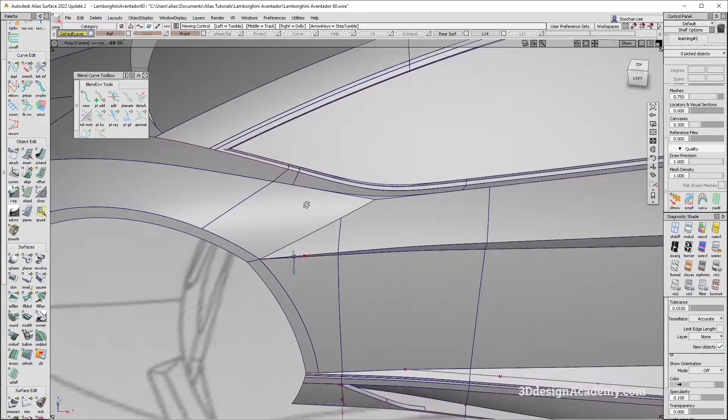Now this is going to be a little bit more difficult because first of all, there are two surfaces that we have to go across at this side, and also this fillet comes to a point. So it's going to be a conical fillet, and also it needs a hard edge over here. So this might require a lot more work than regular fillets. We'll see how it goes.

Okay, so I'm going to start by laying out some curves. And actually, before I do that, let me just extend this one with merge off to see how the intersection is. Okay, so it's pretty close. I would say that's good enough.

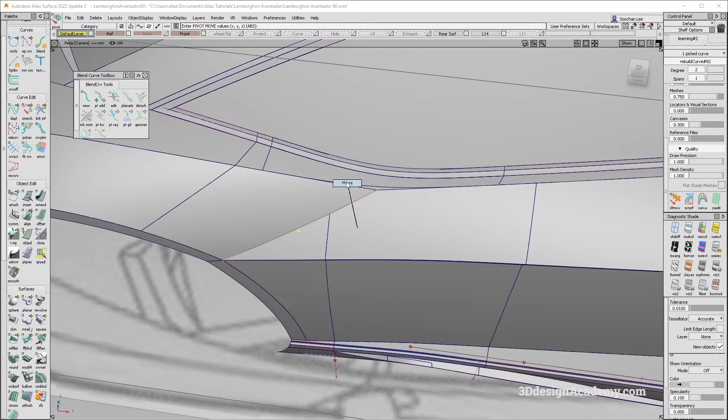So what I'm going to do is just duplicate this curve here. I'm going to snap it over here, and I'm just going to snap this one over here. Now I am going to make this a little bit like a cone-shaped fillet, because I think the fillet is starting somewhere over here. So let's push this in over here, and let's grab this side like this, and push it in over here like that.

Okay, so I'm just going to project and compare the two. First, let's project this from view like this, and I'm going to project these from Z, and I'm going to take a look how the fillet turns out.

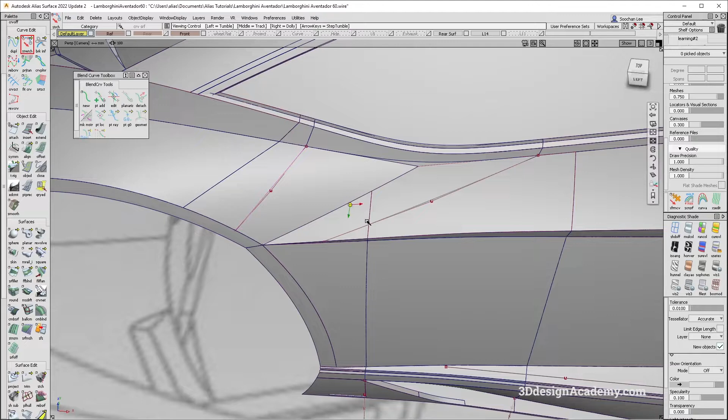So I'm just going to do a little bit more cone shaped, bring this in a little bit like that. Now you want to keep the volume somewhat similar, so I probably need to push this out, because as you can see, the distance from here to here and this here to here is similar, but if you actually measure from a normal direction perpendicular to this line, you'll see that there's a lot less room. So it might not be a bad idea to push this out a little bit. We'll have to see.

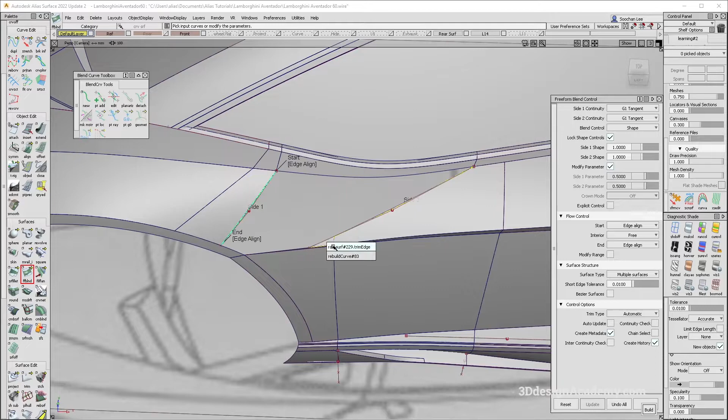Okay, so for this one, let me just trim over here and here. Let's go ahead, and I'm just going to test it out with a Freeform Blend. So let's do that, and I'm going to say default here, and both sides are going to be G2 like this. I'm just going to take a look at the fillet itself.

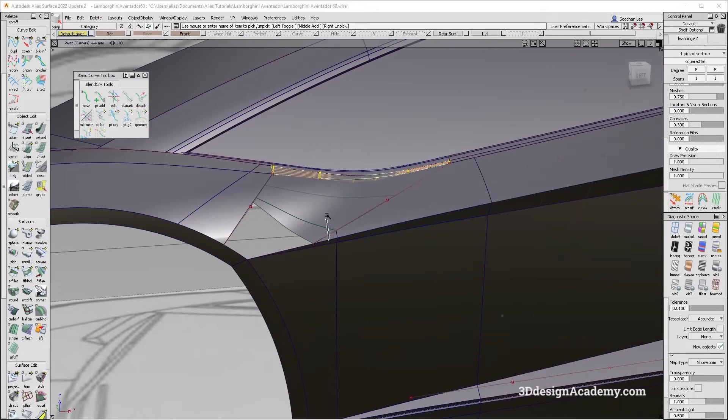It's not bad, but you can definitely see that it's a little bit tighter over here. And also we are going to have a form factor. Okay, form factor doesn't work. It does need a little lead in, because the fillet over here also has a lot of lead in. So there we go. Overall, not too bad.

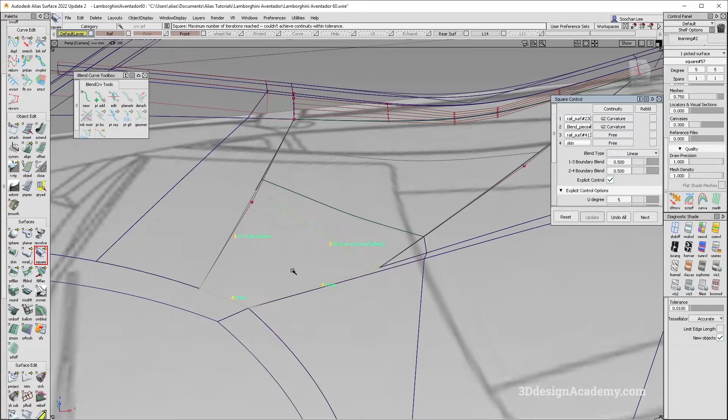What I'm going to do though is I'm going to try to fill this hole over here and see if the fillet is good. So I'm going to say 1, 2, 3, and 4 over here, and I'm going to hit this edge. Now for this one, what you want to do is make sure that 1 is curvature, 3 is position, 4 is going to be position, and 2 also needs to be curvature. But I am going to take a look.

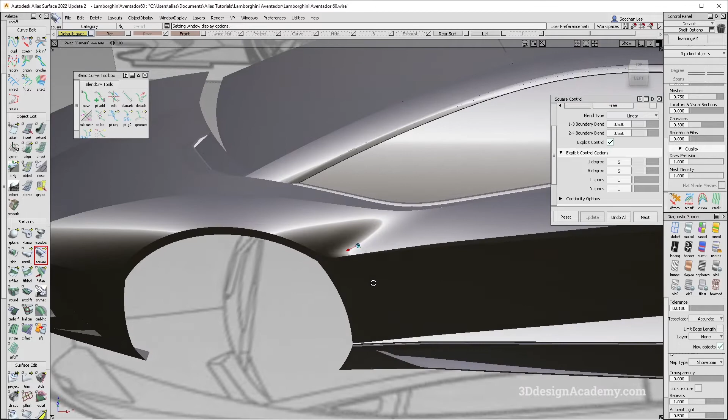Okay, so you'll see that it's actually dipping down a little bit. So in this case, what you want to do is either do a boundary blend over here, or do a little bit of manipulation here to make sure that that's working. That said, however, actually that doesn't look too bad. Now you'll see that there's a little bit of wobble here, but that will need to be fixed later.

But I'm just trying to see if it's creating a somewhat decent highlight, and I honestly think that this doesn't look too bad. Now there is, well, actually, I guess not. Right, so I think the transition might be a little bit harsh. I'm wondering if I actually need to open this up a little bit.

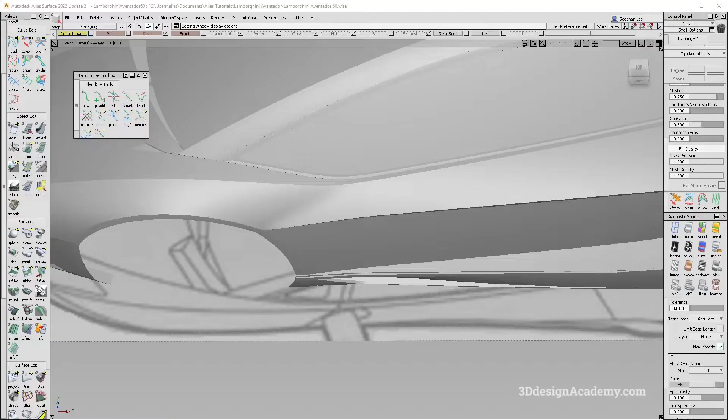Let's take a look. I wish I could see an image that shows that section a little bit better. Now this should show this a little bit better, but I think it's not showing us the kind of highlight that we are in need of. Okay, so I'm going to see if I can find a different image that shows that area a little bit better than the ones we have. This one, no, that doesn't work.

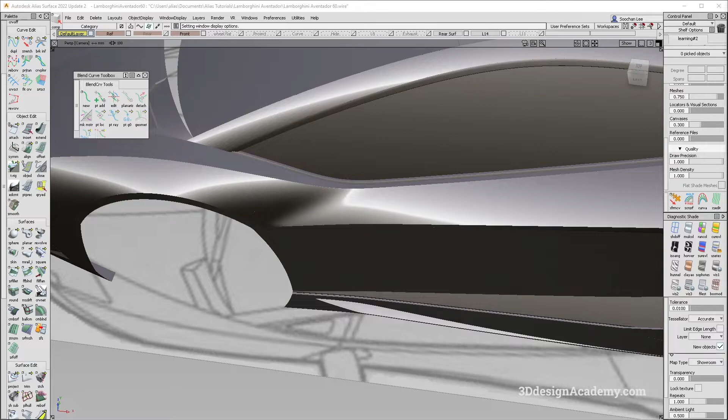Maybe this one. Unfortunately, I don't think it does. Let me grab this image. No, that one doesn't either. Okay, let's try to find a few more images, and hopefully it'll show that area a little bit better than the images that we have right now.

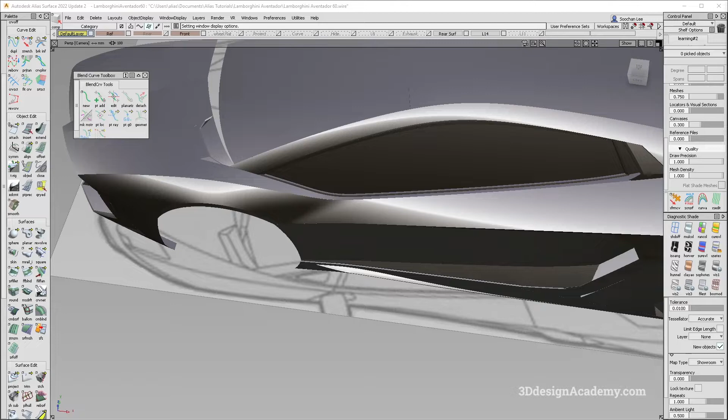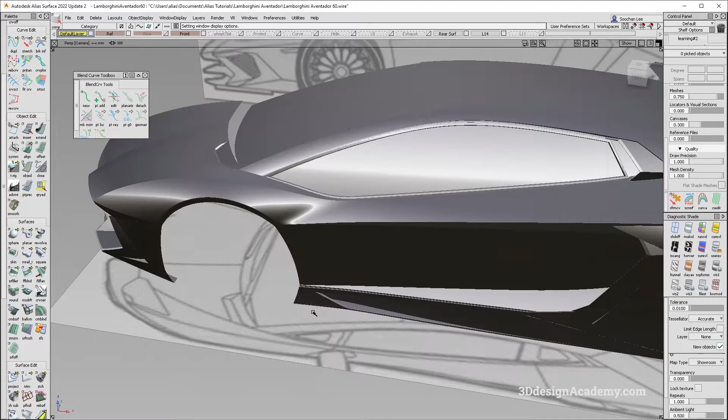Okay, so I do think that it's actually quite tight. So I do believe that whatever we have right now is actually not a bad representation of the real car. Now there is a color line in the middle, so I think that sort of hides it a little bit better. But I think this doesn't look too bad. However, I am going to extend this a little bit more so that we have a little bit softer transition. So I will be doing that, and let's have this image up.

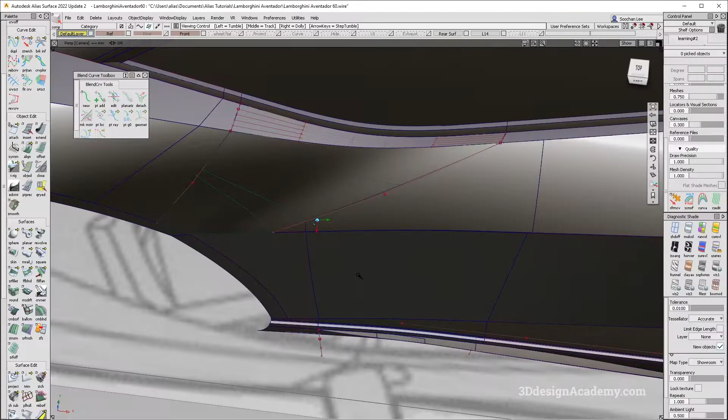And I'm going to try and find maybe a couple more, hopefully from a sort of a top-down view that shows that area. Let's take a look at this one. Yeah, that doesn't really show me much. Okay. Let's see if this set of pictures has it. Yeah, I definitely do think that its transition is a little bit, honestly, I don't think that that's too bad. Let me just point it this way. Okay.

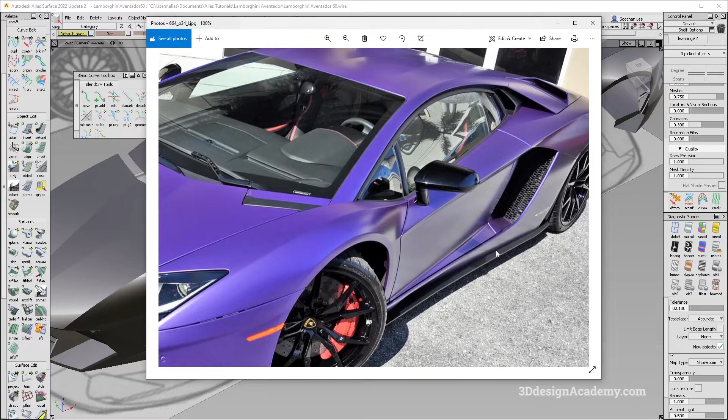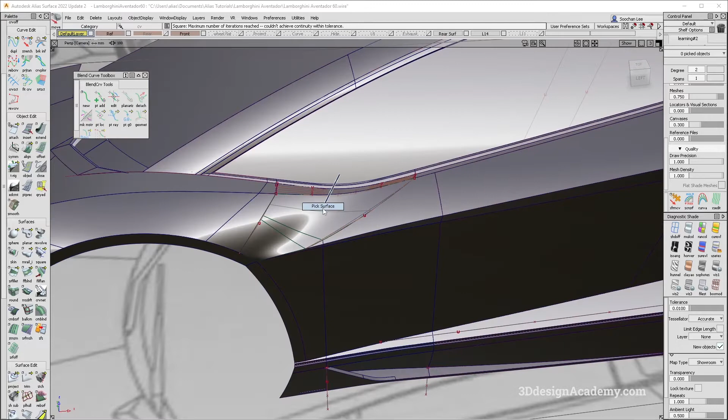Going to see if I can spot a few more. Okay, all right, so I think these are the best references that I have so far. So if that's the case, I think I'm just going to go ahead and just use those. Okay. However, I'm going to expand this a little bit so that the fillet has a little bit more room to transition.

Okay, so here's what I'm going to do. Now it is done in a square. Well, right now it's a freeform blend, but as you can see, the CV structures are not lined up. So I'm going to work on that first. Actually, let's untrim this one, untrim these ones over here, and let's take a look. Okay, I think having this area a little bit bigger should help with the transition. So let's go ahead and trim them again.

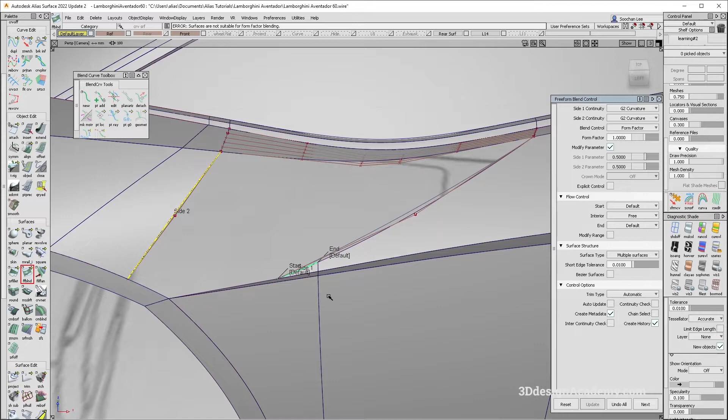Well, actually, I am going to do a freeform blend, but I'm going to use a form factor. Let's go ahead. Oh, okay, so that doesn't work. Default, nope, that doesn't work. So let's try this side, see if that does it. Unfortunately, looks like it won't. Okay, so if that's the case, I'm just going to do a bi-rail. It's going to be 1 here and 2 here and 3 over here. That all needs to be reset.

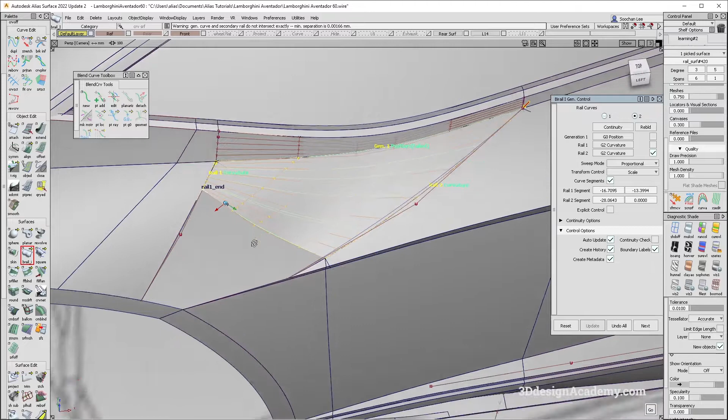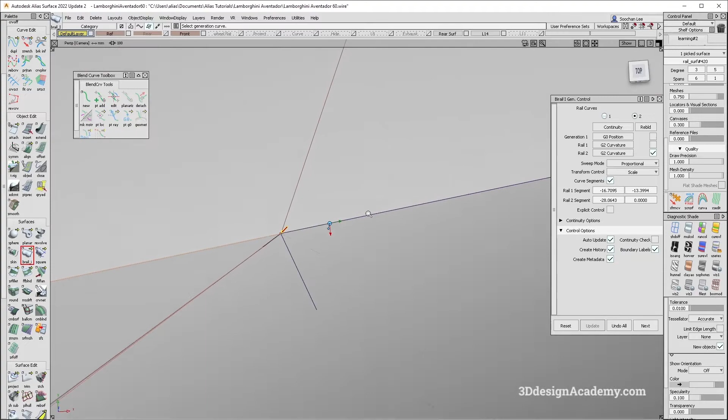I'm going to be doing a curve segment over here, and rail 1 is going to be curvature, rail 2 is going to be curvature. Just going to re-snap all the surfaces over here like this. And now let's go ahead and do a bi-rail again. Well, before I do that though, I just want to make sure that this is balanced, which it looks like it's not. So let's go ahead. Oh, okay. So why is this failing position? So let's take a look.

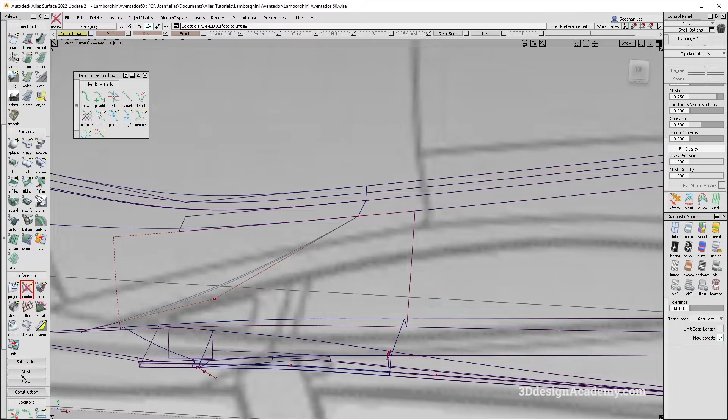Oh, that's not good. Okay, so as you can see over here, it looks like there's a little bit of deviation. So what I need to do is make sure that this is positional. So let's go ahead and delete this one first. This one is okay. Let's just check the positional continuity. Now it is position, but it looks like there's a little deviation that's causing that, which is actually quite unfortunate. So here's what I'm going to do. I might have to change the CV structure on this one.

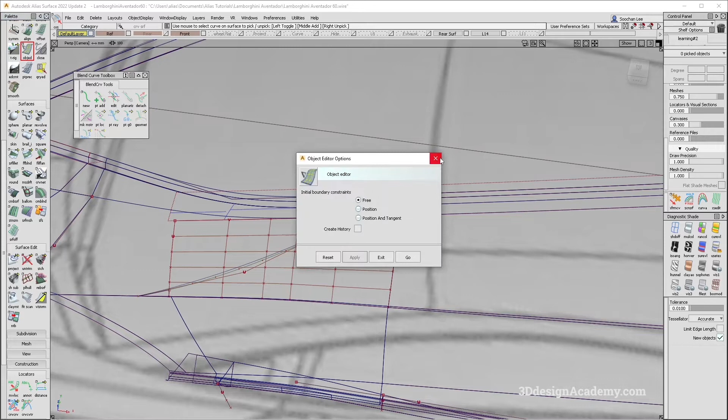We'll see. So I'm going to align this piece over here like that. I'm going to say partial. Now, as you can see, positioning influence does require maximum. Let's see if this does it. So I'm going to just set the positioning influence to 0 to keep the CV structure as is. However, I am going to check the distance. Okay. So it looks like it's 0.0001.

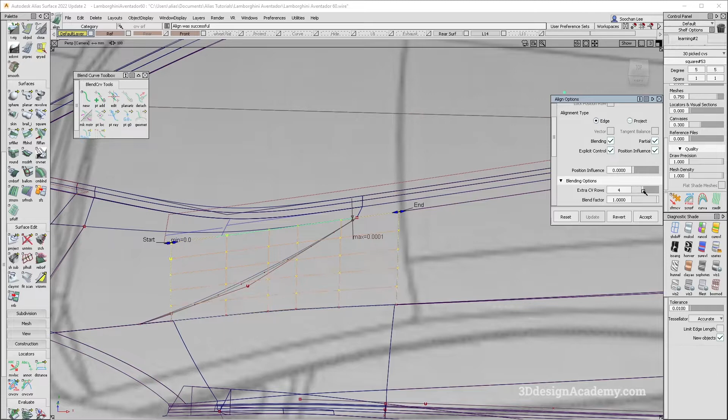Oh, that's perfect. All right, so I'm going to turn blending on and I'm going to just transition into the bottom. It's probably not necessary, but just for this, I think it might not be a bad idea. Okay, so we were able to retain curvature, so that's good. I'm going to trim this area over here, and I'm going to go ahead and use the stretch tool to snap this one back here.

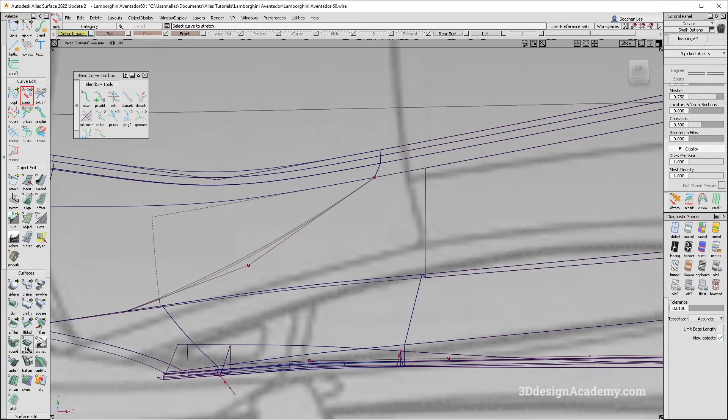Okay, so that's good, and I'm going to just trim this piece over here like this. And let's go ahead and do a bi-rail. It's going to be 1 and 2. Like this. And I'm going to just make sure that the CV structure here is good. Probably leaning a little bit this way might not be a bad idea. Okay. I don't think I'm going to do it too much. Okay, so I think that's good.

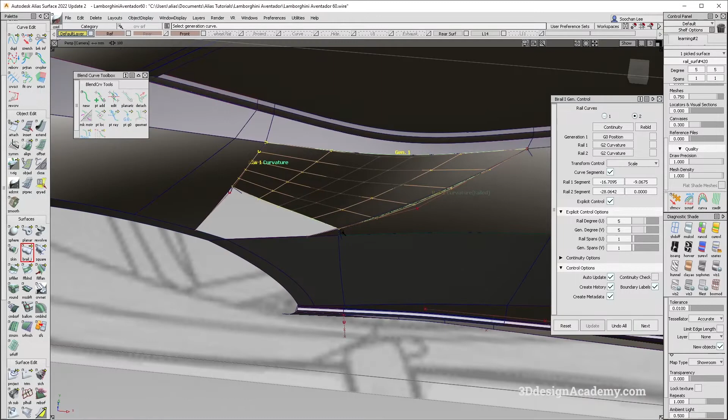And I'm going to just turn on explicit control. It's going to be 5 and 5, to make sure that it is curvature. That doesn't look too bad, although it is failing curvature over here, so I'm going to have to find out what's going on. Probably just turn rebuild off. And now what I'm going to do is, well, let's do this. Okay, so the transition doesn't look too bad.

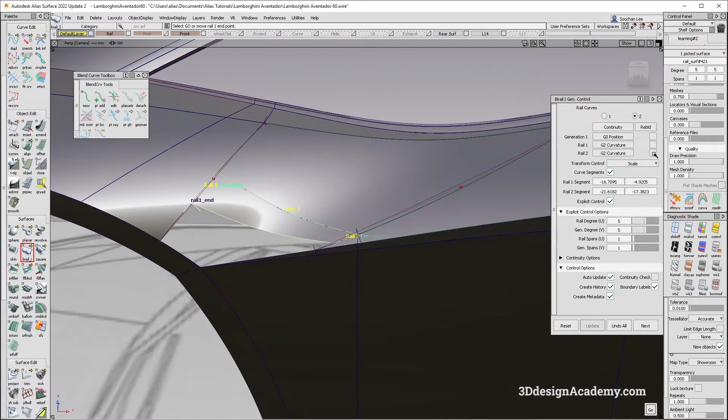However, I do want to align, well, let's try bi-rail first. So it's going to be 1 and 2 over here, and using curve segments, I'm going to push it a little bit like that. Oh, this probably does require a rebuild. So I'm going to just do something like that.

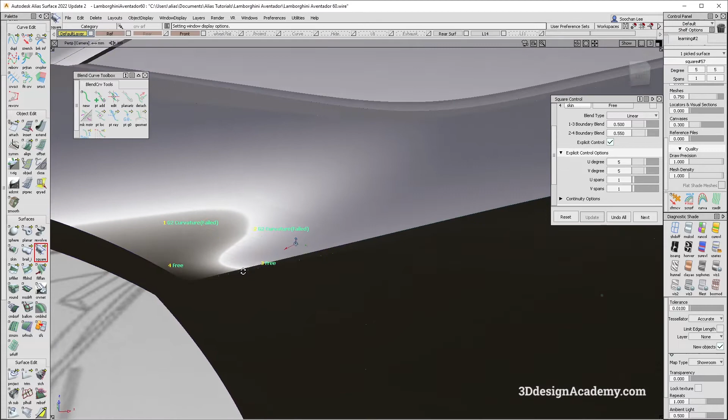So as you can see over here, there's a little discrepancy, which is fine. However, I just want to make sure that this one is going to be okay. So I'm going to hit the square right here. Overall, not too bad. Yes, there's a little bit of flick here, but I think this is overall manageable.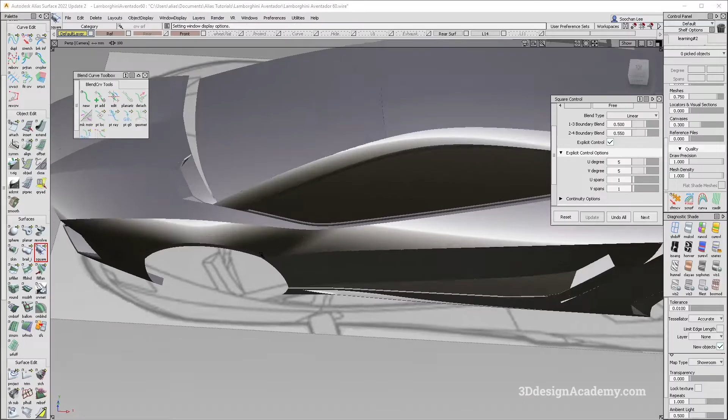Okay, so that's okay. So let's go ahead and do a little bit of cleanup on this surface over here. Overall, I don't think the transition is that bad. It's nice and soft, so I think it's pretty close over here. And if you're worried about this little bit harsh transition compared to this side, I think having a door cut line right there is going to help distract it from the rest.

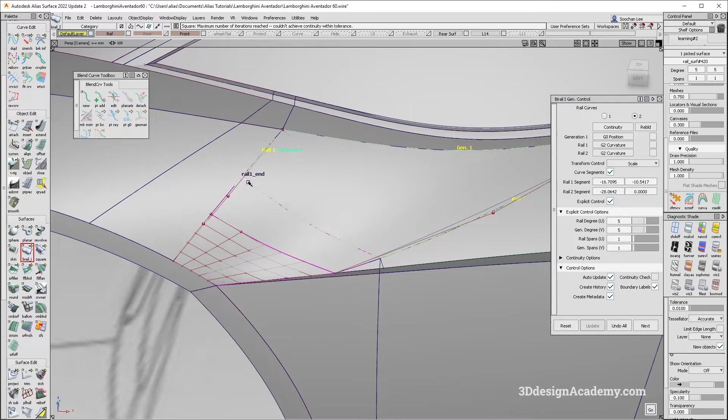Okay, so what I'm going to do is, first of all, I'm going to actually angle this a little bit more so that this has more room to be open. So I'm just going to do that, and I'm just going to do the same thing over here. And let's just check the CV structure a little bit. Okay, so as you can see over here, the CV structure is a little bit off, so I'm going to spend some time cleaning this.

So what I can do is, well, let's actually delete these over here, and I don't mind the shape, so I'm going to just hit the curves over here like this, center pivot, like that, and I'm just going to project over here. It's going to be from Z, and I'm going to do the same thing over here, and I'm going to be using that.

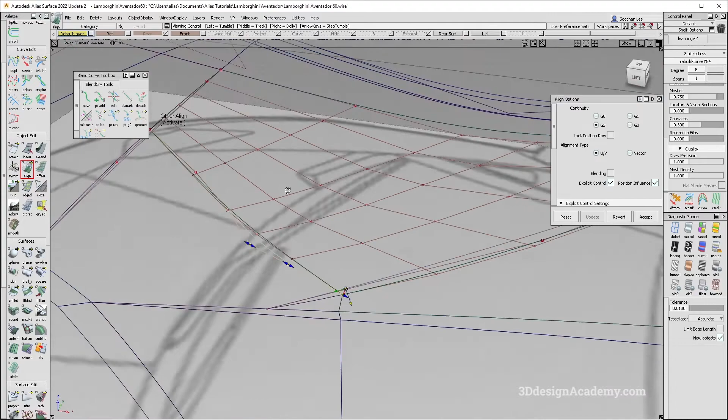Actually, let's do this. I'm going to duplicate the curve here, and I'm using that to align. Let me just delete that. I'm going to align this piece, rebuild curve. It's going to be G2, and I'm going to do the same thing, rebuild curve, G2, like that. Okay, so let's take a look. Oh, I wonder if this... Okay, I think I might be better off doing view. Okay, so let's go ahead and do that again.

Actually, you know what? I think I'm just going to use a blend curve. Okay, so I'm just going to use a blend curve over here because blend curve allows you to align and balance the CV structure a little bit better. So I'm just going to put it over here like this.

Oh, that's not good. Okay, so I do need a little bit of acceleration on this one. However, it's leaning way too much over there. So I'm just going to pull this one over here and I'm going to push this like that. Okay, and let's take a look and see if that works.

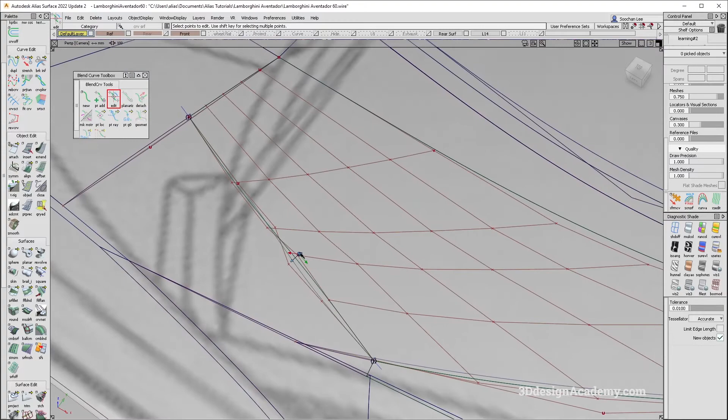Okay, so right now I should not have projected from Z. I'm just going to project it from view. Okay, so let's go ahead and redo that. I'm going to just snap right here like this. And I'm going to delete the curve on surface that's on both sides. I'm going to center pivot, scale up, and let's go ahead and project over here and here.

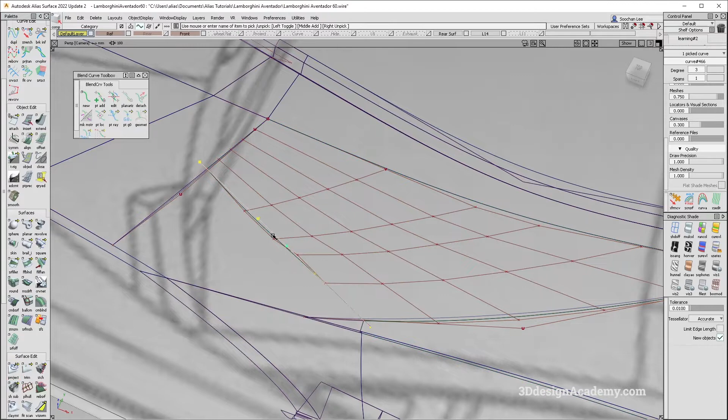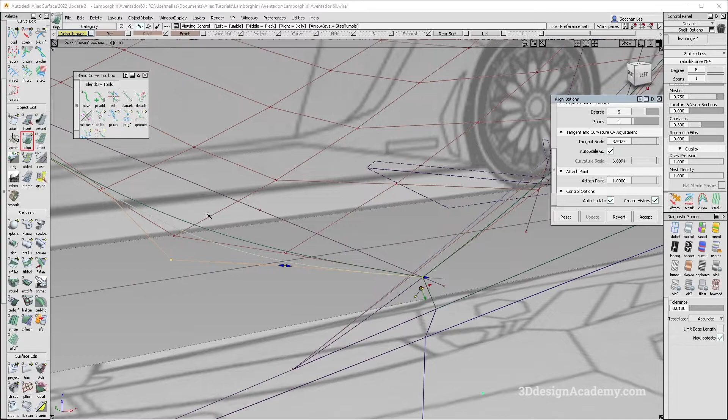Okay, so that's good. And I'm going to do the blend. Oh, well, actually, you know what? Let's just duplicate this. I'm going to align this curve onto this side, and I'm going to align this curve onto this side. Okay, and I am going to turn auto scale G2 on both sides, so that's a little bit easier to manipulate. It is lined up.

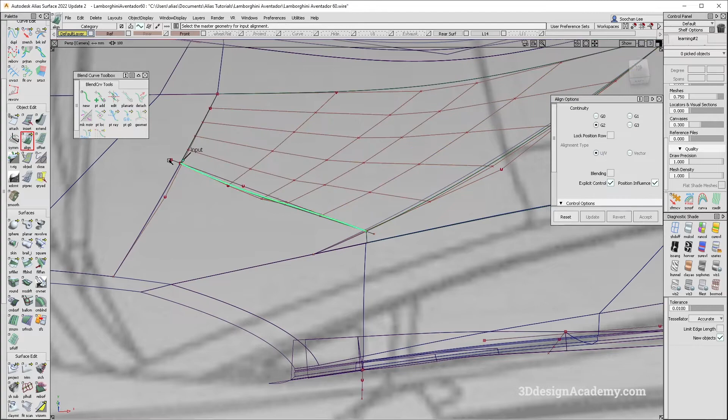Okay, I think I'm going to change the angle a little bit more to this side. So I'm going to say view. Same thing. Let's change the view. Okay, so for instances like this, what you want to do is rebuild or revert and align again. So I'm going to say curve on surface over here and align to curve on surface over here. Okay, so I think that's a little bit better. Okay, so now that's done.

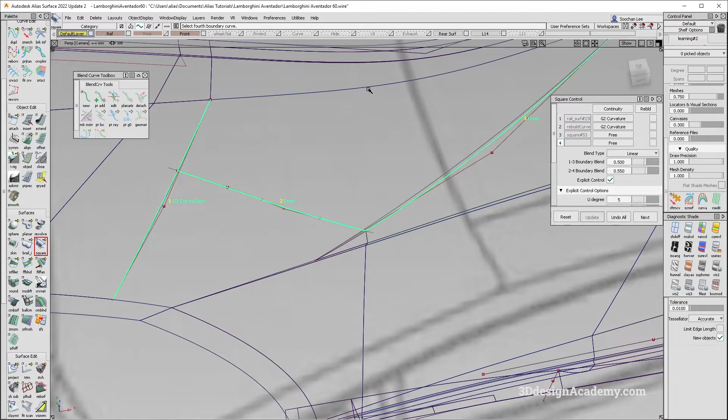Let's go ahead and I'm going to hide this for a second. Okay, so I think the CV structure doesn't look too bad. And let's go ahead and do a square over here. So it's going to be 1, 2, 3, and 4. Like this. And there's going to need to be a bi-rail. So it's 1 and 2, like this. I'm just going to snap this back. Okay, so this basically gives you an idea of where things are. And now I'm just going to block the last surface over here like this.

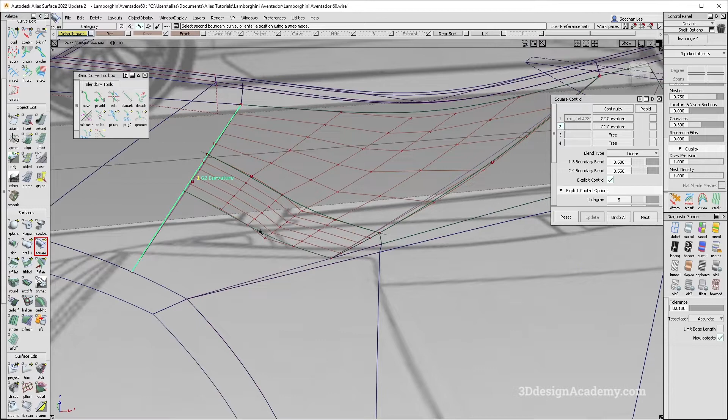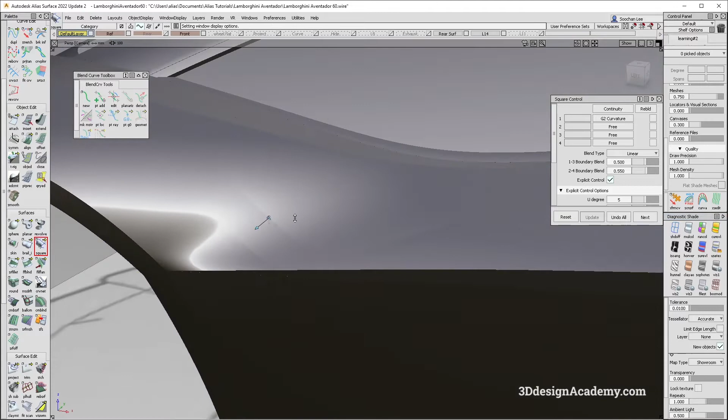Now this is set to curvature, but I'm going to just make sure all the CV structures are good. So 1 is going to be curvature, but 2 I'm going to leave as free for now. So this basically gives you an idea of how these CV structures are supposed to be aligned. So right now you'll see there's a little break. And why is it not? Oh, 3 needs to be curvature. There we go. Okay, so there is a little break, and there's a break in the CV structure as well. So if possible, you want all of these CV structures to be aligned as much as you can.

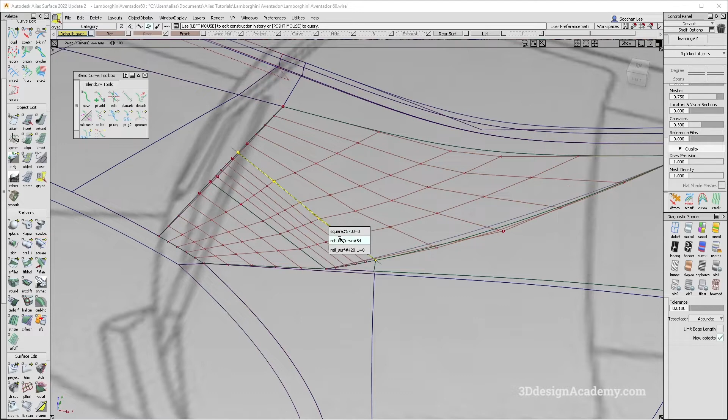So what I'm going to do is, oh, I don't want that. I'm going to just push this a little bit like that, and this one a little bit like that. Okay. I think I might need to have a little bit more control over here. This is not giving me the result that I want with the curves alone. First of all, let's just do that. So I think instead of pushing this around, I need to have another curve here to set this up.

Okay, so in order to do that, first of all, let me just get in the view right here, and I'm going to actually delete these. Let's just duplicate this side. What I'm going to do is extend this side, with merge off, extend. And I'm just going to strike a curve from here to here. Center pivot. I'm going to project this side, and I'm going to project this side. Like that.

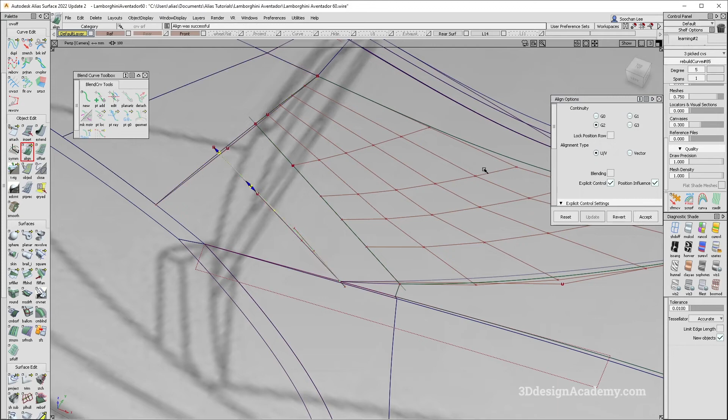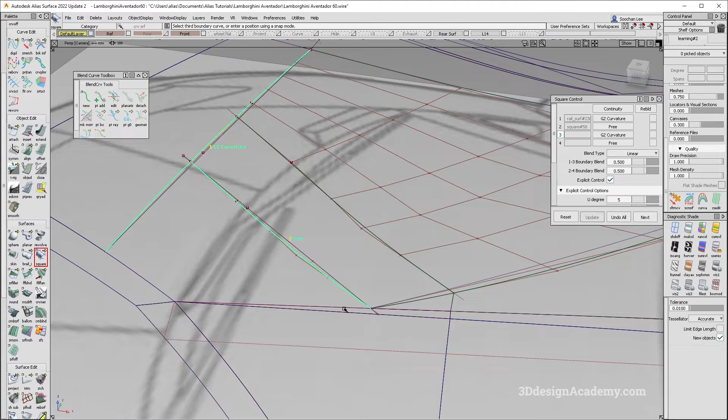And let's align this curve over here. Curve and surface. Auto scale G2's on. Do the same thing. Notice how I extended this surface because we don't have room here. So you just want to extend that with merge off so that you actually have a surface to line this up to. So now let's go ahead and do a square. So it's going to be 1, 2, 3, and 4. And lastly, 1, 2, 3, and 4 over here. This one I'm just going to leave everything as position except for side 1, which needs to be curvature.

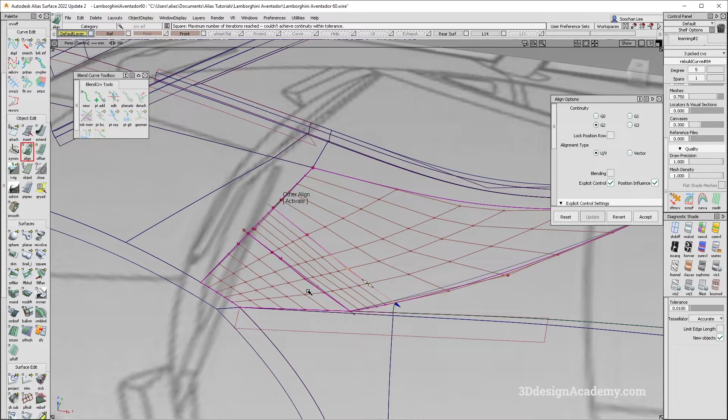Okay, so now let's do this again. Let's push and pull until the CV structure is a little bit more even. So this side, okay, there we go. Let's go ahead and grab the curve. I'm just going to push this in a little bit and push this out. And on this one, I'm going to push this like that and push it this way so that all the CV structures are a little bit more even. Same thing over here. Push it out like this. Okay, so that looks a little bit better. I might just do that a little bit. And I'm going to push this one.

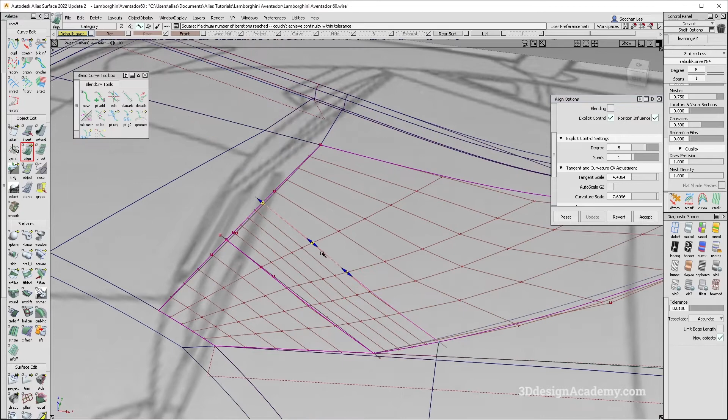Okay, so in this case, I'm going to first delete the construction history. I want to delete the construction history because sometimes when you have auto scale G2 on, align does funky things. So you just want to make sure that it's off over here. And I'm going to do the same thing here. So I'm just going to delete the construction history here, and I'm going to realign with auto scale G2 off.

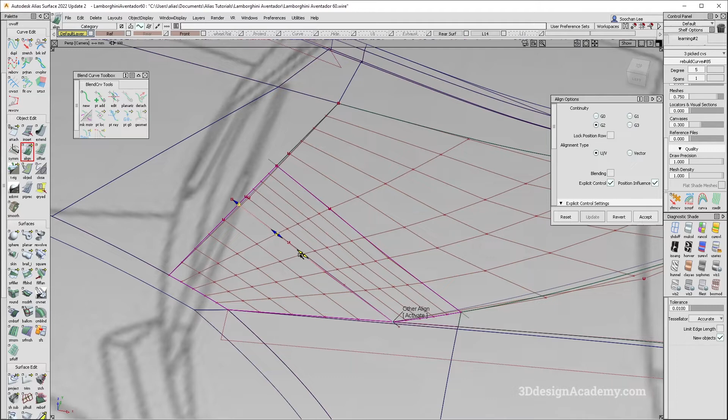And let's just try to line them up to the best of our abilities. Okay, so I think that looks good. I mean, it's not going to be perfect, but you just want to make sure that it is as close as possible. So let's just do that a little bit. And I think I'm going to do a little bit more manipulation here. Okay, so I think that's pretty close.

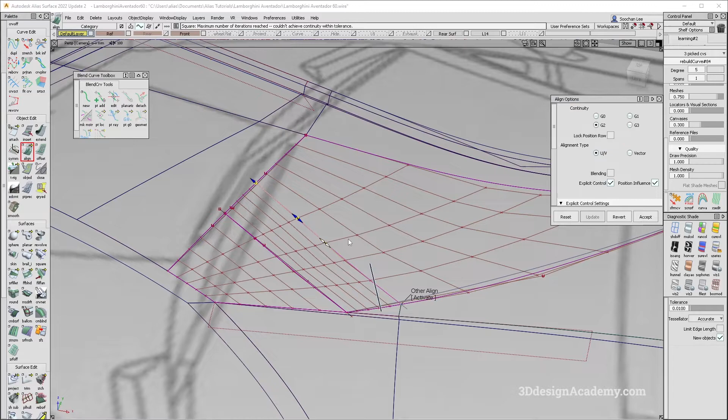Let's just check the highlight. Okay, so right now you'll see that this is way off, but we do need to align this one. However, this one on the top, there used to be a very big kink. You'll notice that it's almost gone. Okay, so now what I'm going to do is I'm just going to try and see if I can align this a little bit better.

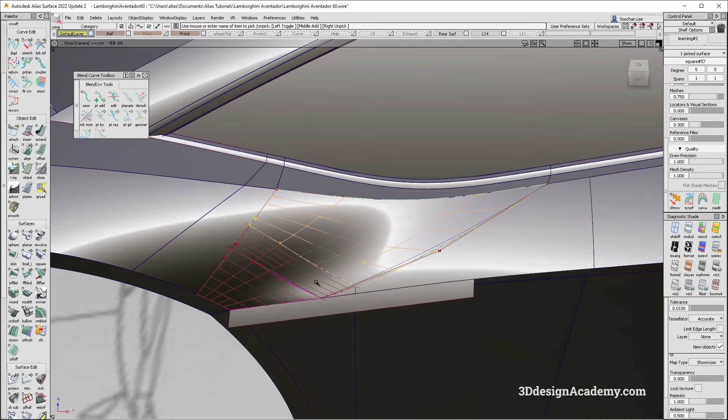Now, this is where things get a little bit interesting. So this is the primary surface. So this should be the primary, and I should actually be aligning this surface to this one. But the problem is this also takes up a lot bigger area than this one. So in this case, I would probably say aligning this one to this one is better than vice versa. So let's go ahead and see if that's going to give us the result that we want. Now we do need to align it.

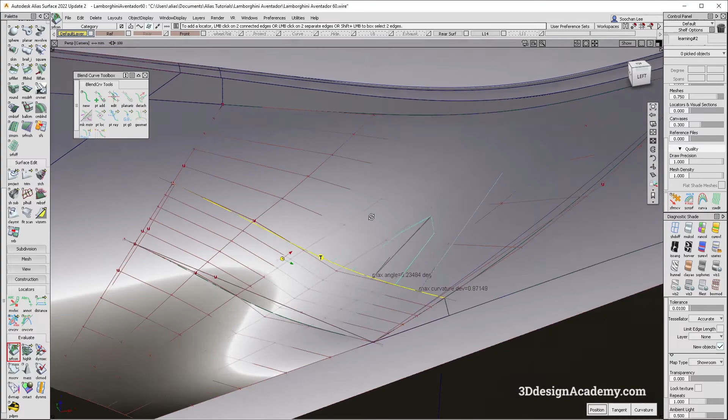So I am going to turn surface continuity tool on, show max label, show comb will be on. I'm just going to check the continuity deviation over here. So it looks like the max angle is only 0.23, which is actually pretty close. So let's go ahead and see if I can line this up. So I'm just going to align this one over here. It's going to be G2. Okay, so that looks pretty good.

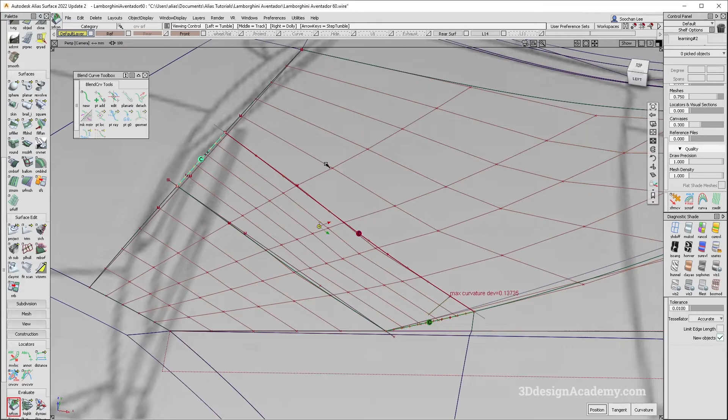But because of the CV structure here, I am going to turn vector on. And it looks like curvature deviation needs a little bit of work. Okay, so far not bad. And let's go ahead and see if the continuity here is still good. Yes, it is. So I'm just going to delete the construction history and let's try to get the curvature lined up nicely. So in order to do that, I'm just going to grab transform CV here.

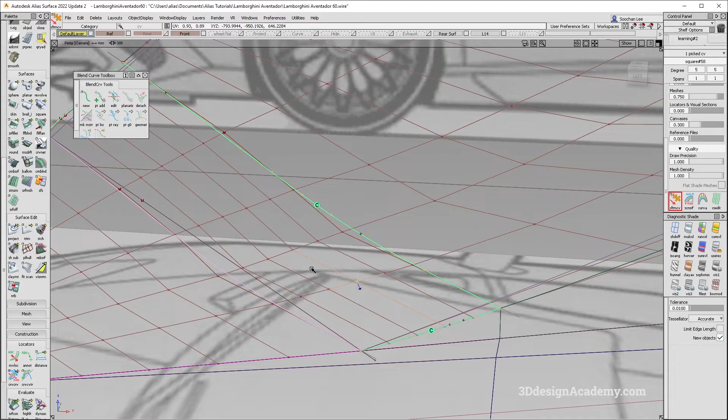It's going to NUV, and I'm just going to grab 5000 for mouse sensitivity. I'm just going to push and pull until I can get curvature continuity there. Oh, there we go. That was pretty quick. And now we have to line this up. Now, in order to do that, one of the things that you can do is just to make sure that this is curvature and try to manipulate these CVs over here.

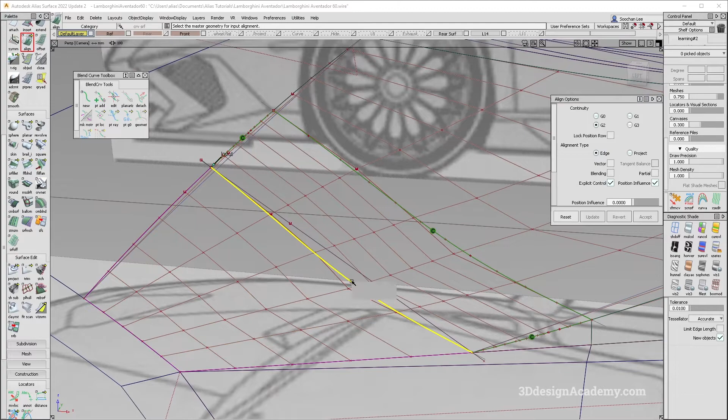But my preferred way of doing this is, well, oh, that needs to stay curvature. This is going to be free. I like to use align. So what I'm going to do is I'm just going to align this piece over here to this one. It's going to be G2. I'm going to say vector. And now with the align tool, you have the option of blending. So I'm going to turn blending on. It's going to be 2.

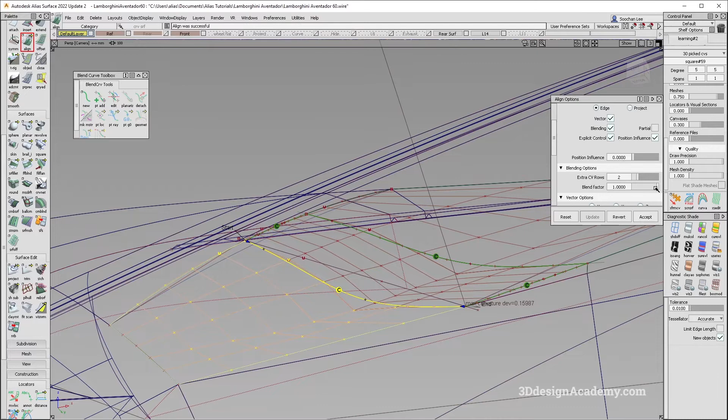And depending on how the transition is, I'm going to either do a 0 or 1 or something in between. I think I'm going to do a little bit less. Maybe 0.8 is good. Well, I don't think it makes too much of a difference. Okay, I think I'm just going to keep it 1 for this. Now, there is a little bit of curvature deviation here, but let's just check the highlight. Okay, so this did ruin the continuity over here, so I do need to make sure that that's aligned.

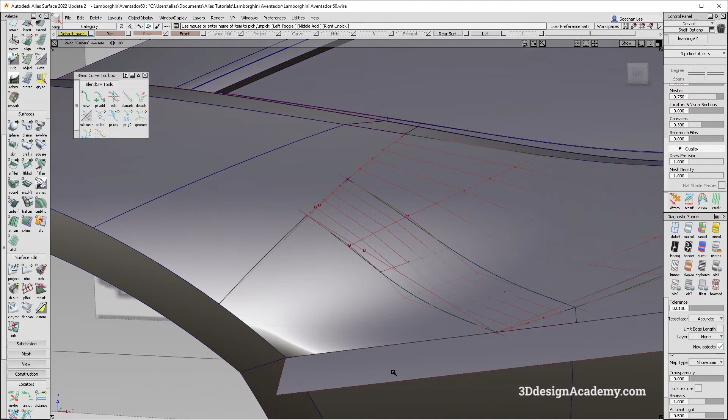So let's go ahead and I'm going to say G2. I'm going to realign it to this surface. It's going to be partial and blending will be turned off. Okay, and this surface, I think I should just hide it for now. Okay, so the only problem is right now, I did align this one. It looks like it's a little bit off. So let's go ahead and take a look at what we need to do.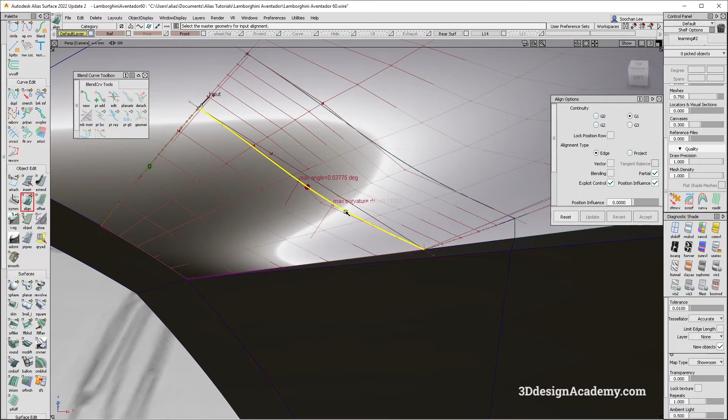So it is curvature here, it's tangent here. So let's try to get tangency in. So let's grab this surface over here. Let's try to make sure that's tangent. I'm going to say vector is on. Okay, so at least we got tangent. And now let's see if we can get curvature.

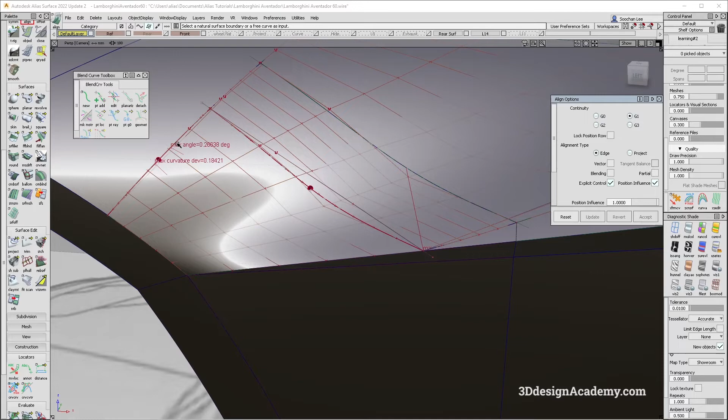So looks like curvature is actually kind of all over the place. Okay, so I am going to set curvature to here, position influence to max, and I'm going to see if I can just set the tangency here and see if that works. Okay, so we got tangency here, but tangency failed here, so I think I need to manipulate this a little bit more. So first of all I'll delete the construction history, and I'm going to see if curvature.

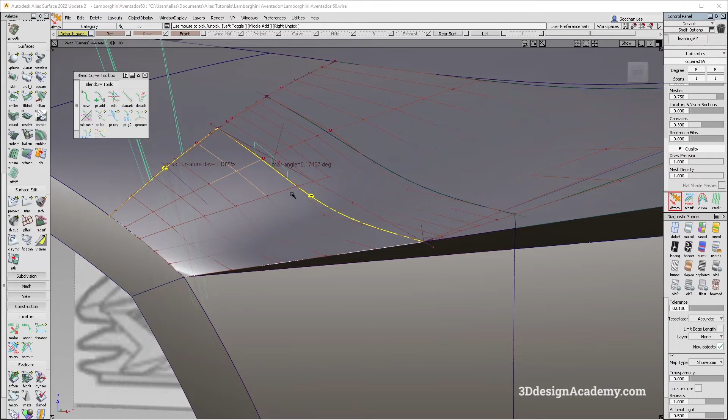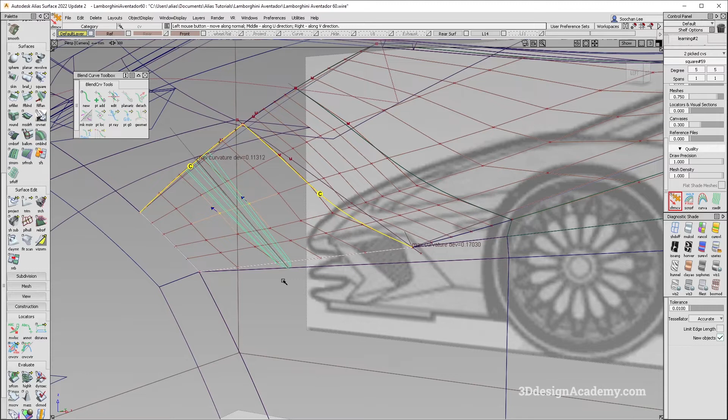Okay, so this is going to be a little bit difficult. Okay, first of all, let me just try to get tangency corrected on this area. Okay, so we got tangency there, but we got curvature issue here. So at least it's one direction. So let's see if I can get this corrected too. So I'm pulling these two CVs, which are closest to the comb where the peak is, where the alignment is off.

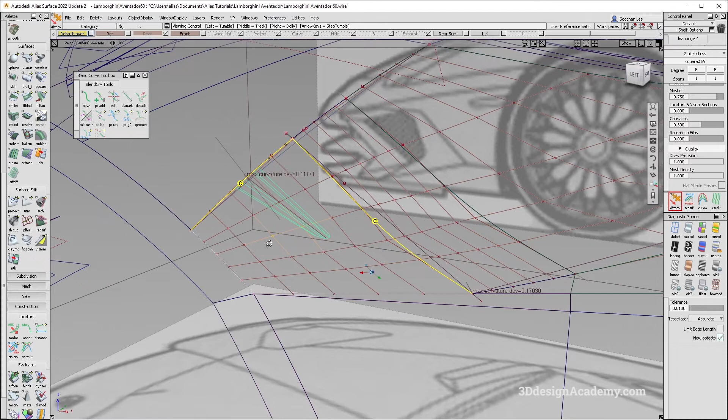And you want to manipulate these two because this is a position line, this is a tangent line, and this is the curvature line. So you want to make sure to pull the curvature line, in U and V. And I think I should be able to get it. Okay, so it's starting to deviate a little bit. So what I'm going to do is, well, I think I can just do that.

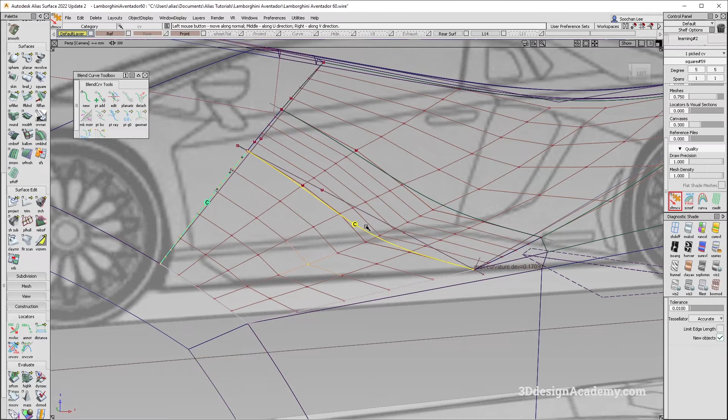And you'll see that there's a little bit of curvature deviation here. So I'm going to just pick this one up and push it down until this comb here disappears. Okay, so we also have a little bit of issue here, but this one, I think should be pretty easy to fix. You see the comb going up here, so that also needs to be adjusted. But okay, so if you see this right here, you'll see that the comb is starting to go up here.

So you want to stop and see if you can manipulate any other CVs to make sure that that doesn't happen. Okay, so it looks like it's trying to break tangency, which you don't want. And I think I might have to grab other CVs in order to make sure curvature is good. Okay, so one of the reasons why this is happening is because this actually comes to a point. It's not a natural flow of the fillet right here.

And because the natural flow of the fillet is in this direction and it turns, sometimes this causes a little bit of deviation and a little problem trying to get this curvature corrected. So I'm going to see if adjusting the position row is going to help. Now you just want to make sure that you don't go too much, because if you do, that's going to fail your position. Okay, so I'm just going to see if this helps. Nope.

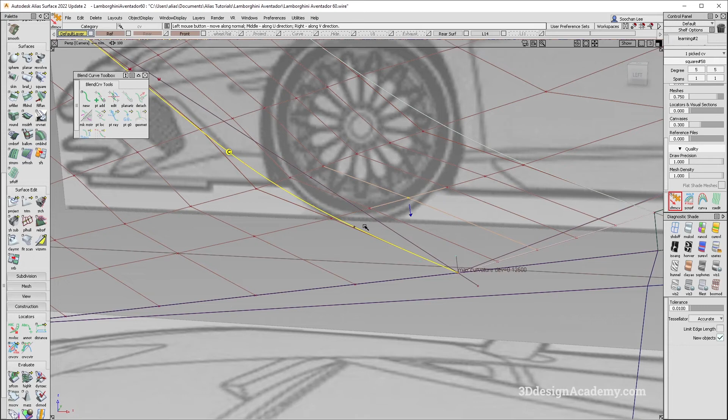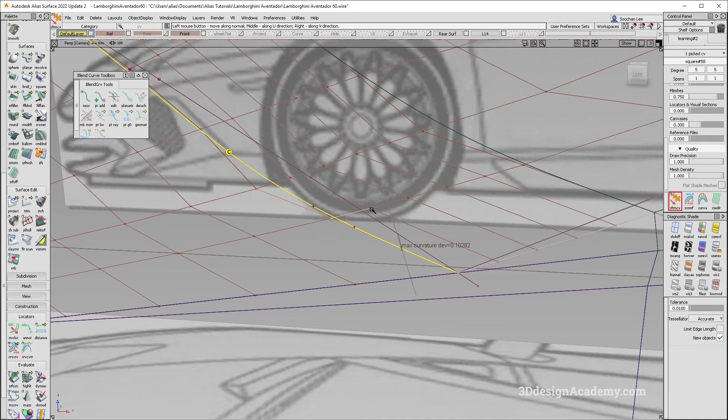I think that might be it. I'm going to see if I can adjust on this side and still get the desired result. Now, I probably want to keep it local. Okay, so that's good. We're getting close. Okay, maybe I'll just touch this one. No, that doesn't work. So let's try this one over here. So close. Okay, so it looks like that's starting to break tangency. So I'm just going to, oh, there we go.

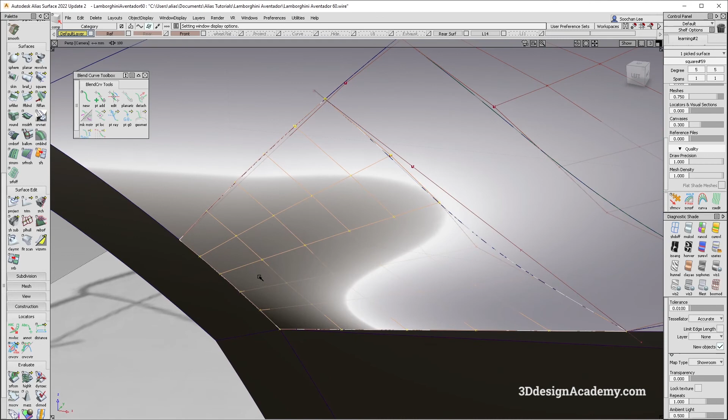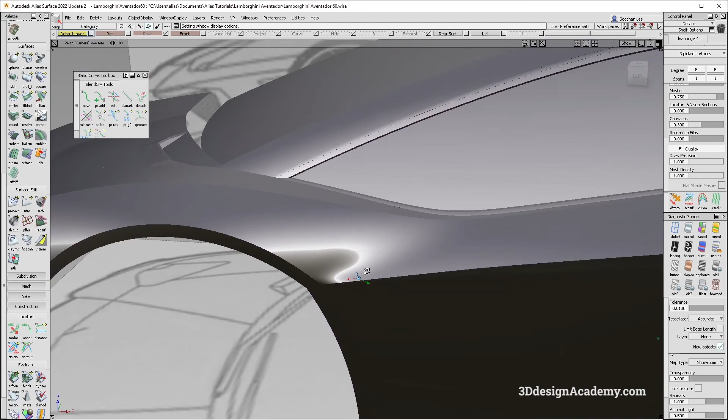Okay, it's barely, but we got curvature on all sides, and our highlight looks great. I think the problem might be this CV structure, I can probably push this a little bit more. Yeah, I think I might want to do that. Okay, so I'm going to revisit this area because I don't like how the highlight transitions over here. So I might either make it a little bit smaller or revisit this area in order to make a little bit more improvement.

Okay, that's all. However, I'm going to have to try this a little bit more and get a smoother transition here. But this is going to be for the next video. Okay, so that's it for part 60.